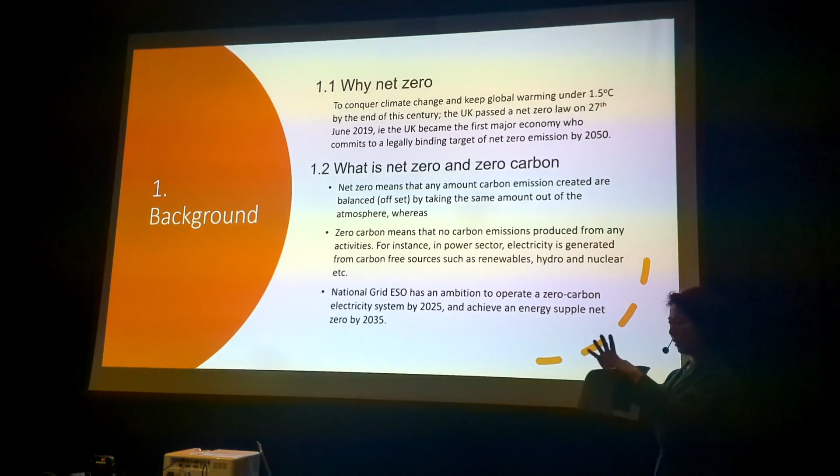So in the power sector, electricity is generated from carbon-free sources such as renewables, hydro, nuclear, bio energy, etc. National Grid ESO has ambitions to run a zero carbon electricity system by 2025 and achieve an energy supply net zero by 2035. So I will talk about this difference: which part 2025 covers, and how the 2035 scope is different.

Continuing on this background part is the role of networks in energy supply. As we know, power networks, transmission and distribution together, are transportation infrastructure to take electrons generated in power plants and send them to end users. So power networks have towers, lines, cables, substations at various voltage levels, and control centers, control rooms, hardware, software, communication networks. So that is power networks.

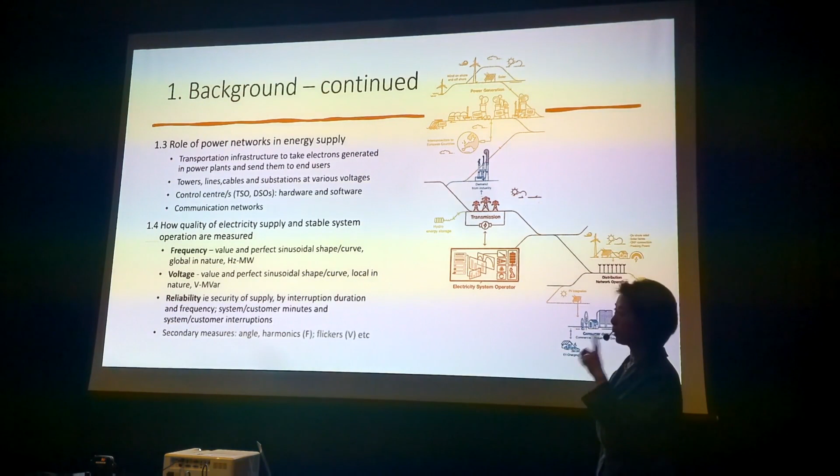And then how electricity quality is measured. You cannot see electricity, but you can feel it. We have lights, our laptops and other devices. So electricity is measured by three fundamental, first tier criteria. One is frequency: magnitude, value and shape, a very strict sine wave. In the world most have 50 hertz, some 60 hertz. Voltage, also value as well. We don't talk about direction yet, it's just value.

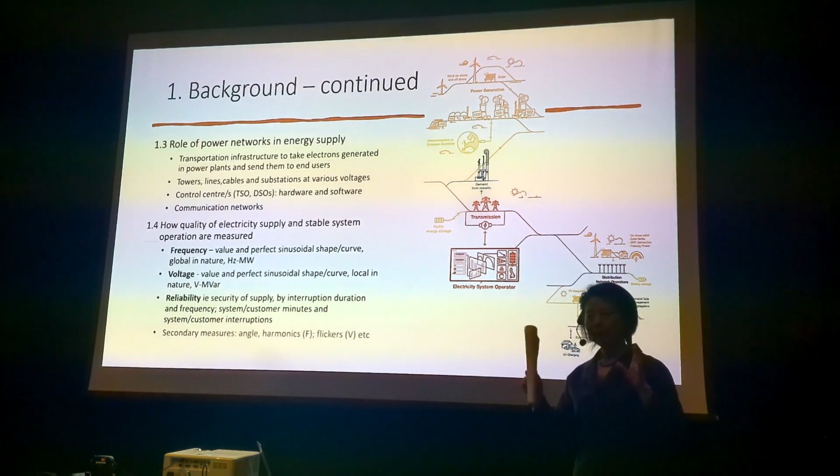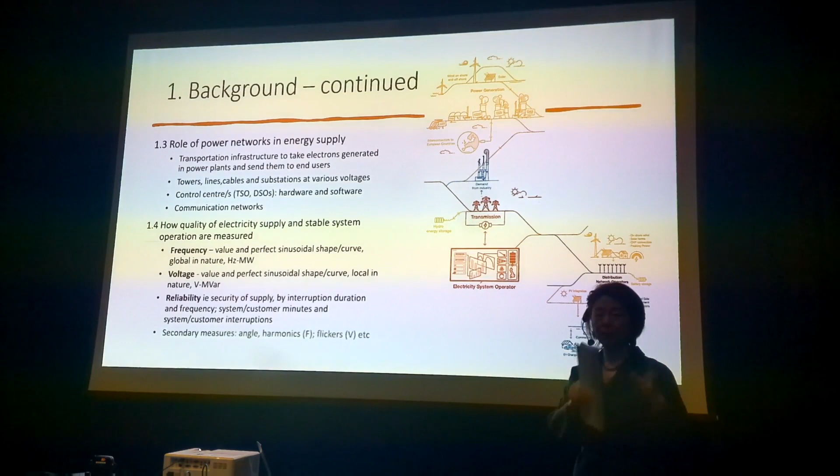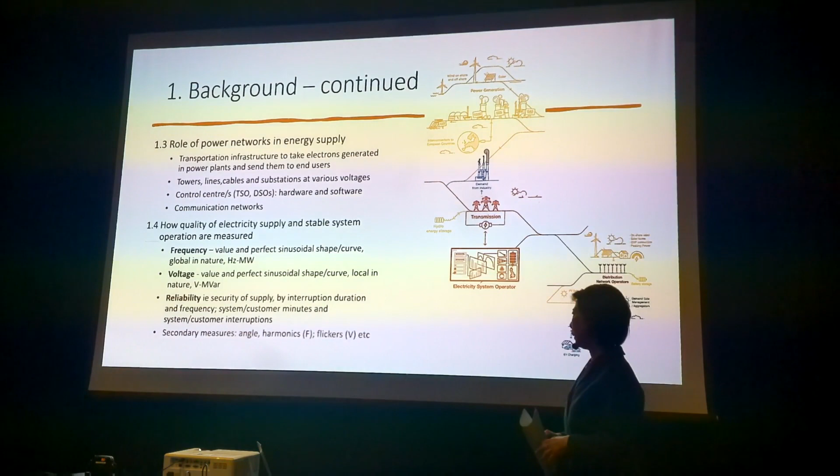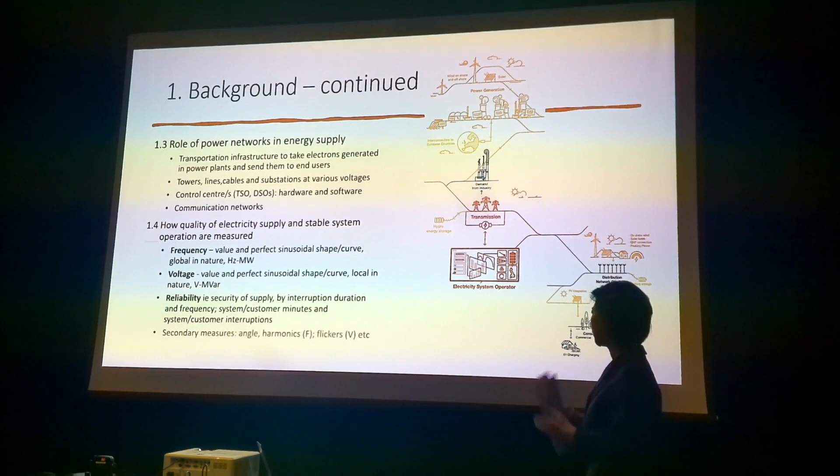The third one is reliability. The reason I mention this is because today, all the new products, services and procurements are quite dynamic. Containment, for instance, or lots of products designed, and how the electricity market runs, why they need these different bits and pieces, different markets. It's because of this: frequency, voltage, and reliability. These three top layer, fundamental parameters measure the quality of electricity. And of course there are other measures like angle on long lines, harmonics and flickers, etc.

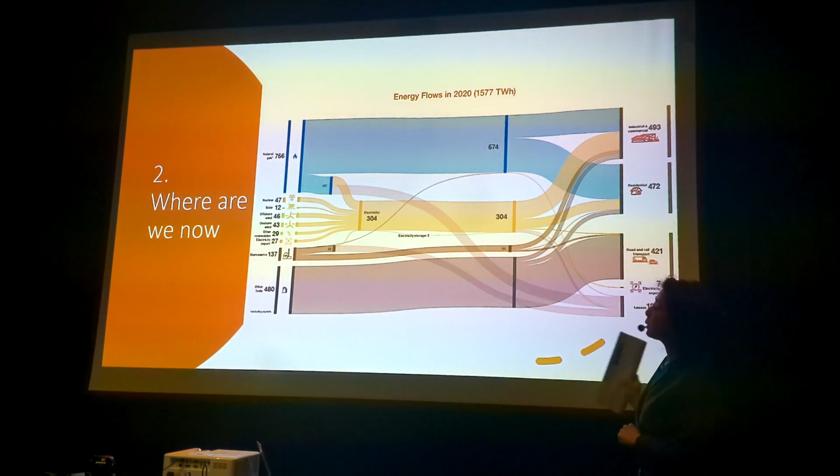Right, where we are today. This is an energy flow chart in 2020. Our energy supply and consumption was 1,577 terawatt hours. You don't need to remember exactly, but if you can, it will help you later to see our future scenario, the direction the whole economy will travel, which is to reduce. We grow the economy, we grow everything, but we reduce energy consumption and production. I will show you how that can be achieved.

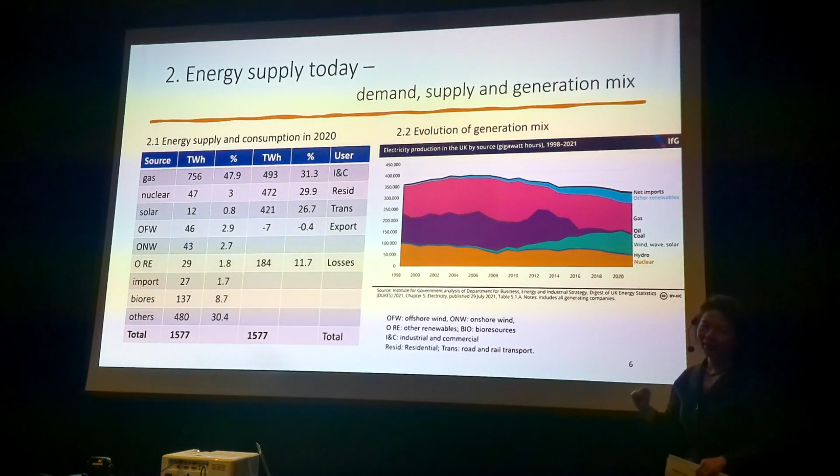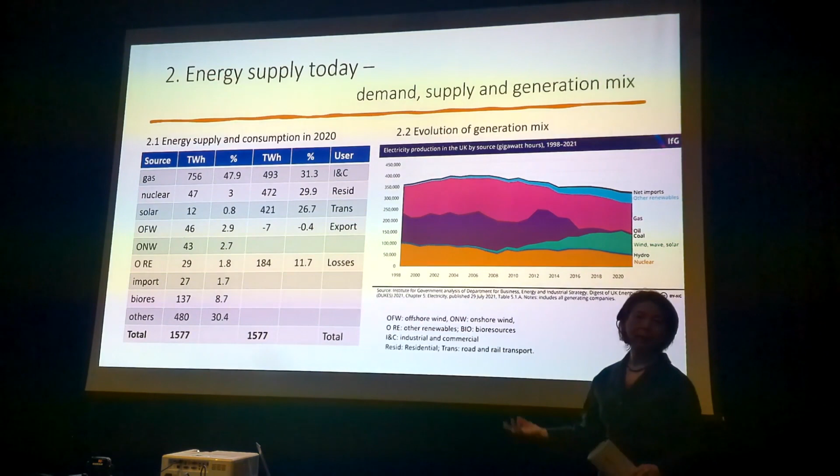And we have small hydro in the UK. Nuclear, I think, is in decline. We used to have quite big nuclear, 27% in terms of terawatt hours, but now it will get smaller in the next 10 years until, I hope, Hinkley will be commissioned by then, because another 2 plants in the existing fleet are scheduled to close for decommissioning in less than 10 years. So nuclear, we actually need more. We need Hinkley to be commissioned and SMRs somehow. So that is the message, one way to look at where we are today.

The second measure is emission. This is more direct. There are different measures when we talk about emission. Most people talk about total quantity, how many million tons of CO2. That is a common way. So to see where we are in the UK, I use these three pieces of information. One is to see where we are in the world. The good news is we are not in the top 14. I only managed to go that far. I'm sure if we look at 100, the UK will be somewhere.

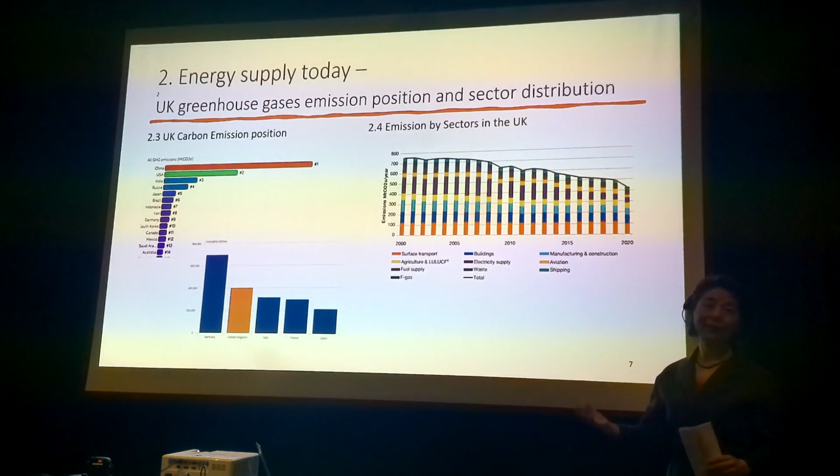So that's good news. Worldwide, UK's emission is small. But in Europe, we are second largest after Germany, and then there are other countries. That's the scale of Europe. And then coming back to our own country, it's not to blame any sector, but to see the contribution, which sector or type of technology contributes more to CO2 emission or equivalent. Equivalent must always be used, because when we talk about cows, it's not CO2, but it's one of the GHGs. So this one is UK emission by sectors.

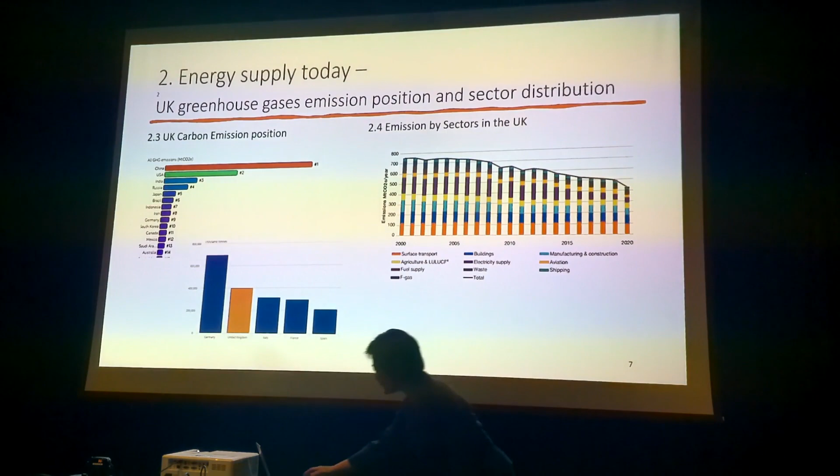In fact, the transportation or surface transport, just by looking at this, I think they are contributing more, followed by buildings, and then manufacture and construction. Electricity, the purple one, is actually quite small, maybe similar to agriculture. So this is a comparison or overview. Now I drill down from the top to more detail. This slide is to look at carbon intensity in the electricity sector.

The good news is the trend: if we look at the same time period from 2009 to 2021, the carbon intensity is reducing. This is very, very clear and consistent reducing. So that graph shows the electricity supply sectors.

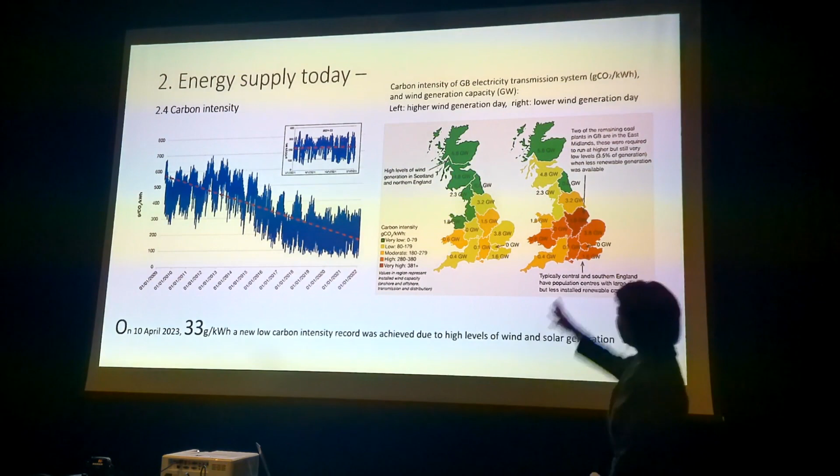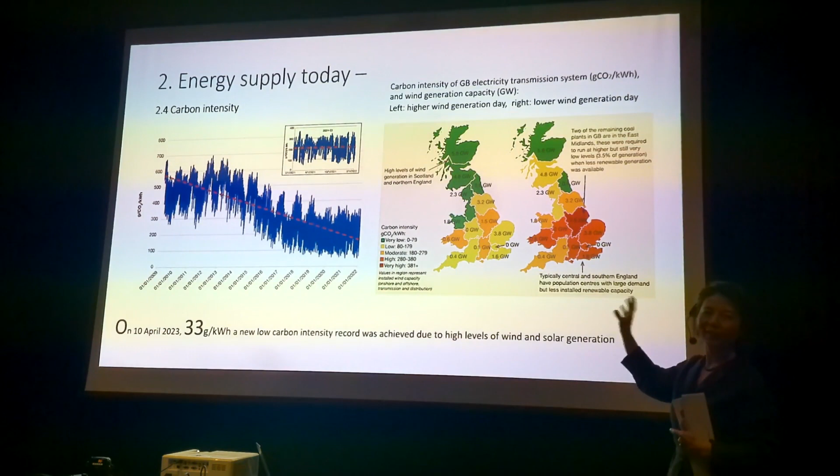And this UK map is also a comparison. The one on the left-hand side is on a strong wind day, because offshore wind produces more renewables than onshore wind or solar. So it's very important when we choose this day when offshore wind is doing good. So that side is a good day. When we have a good day, we have so much green energy produced.

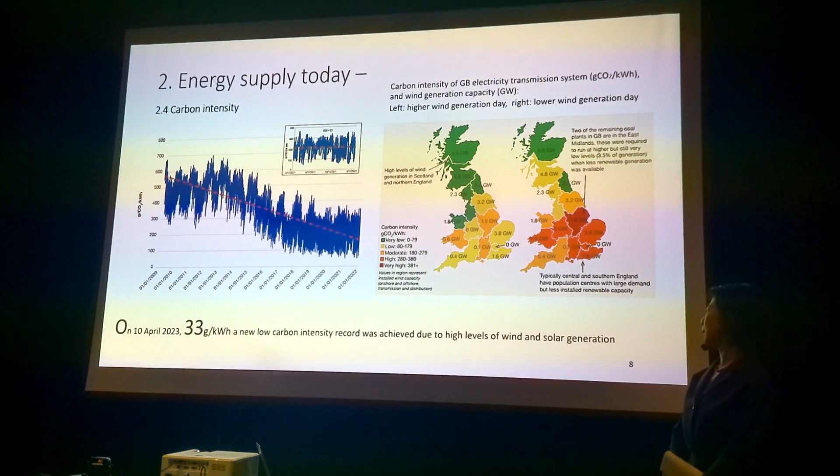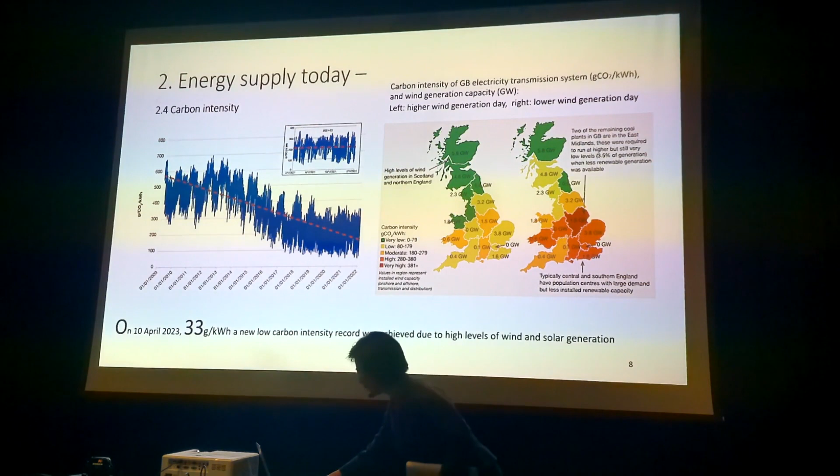On the right-hand side is another extreme, when offshore wind is low in the country. So this is carbon intensity by location, every location. Another even better news is, very recently, I saw this in a news piece: on 10th of April, National Grid recorded the lowest ever in our history, 33 grams per kilowatt hour, a new record carbon intensity this year, due to the high level of wind and solar. So this is where we are.

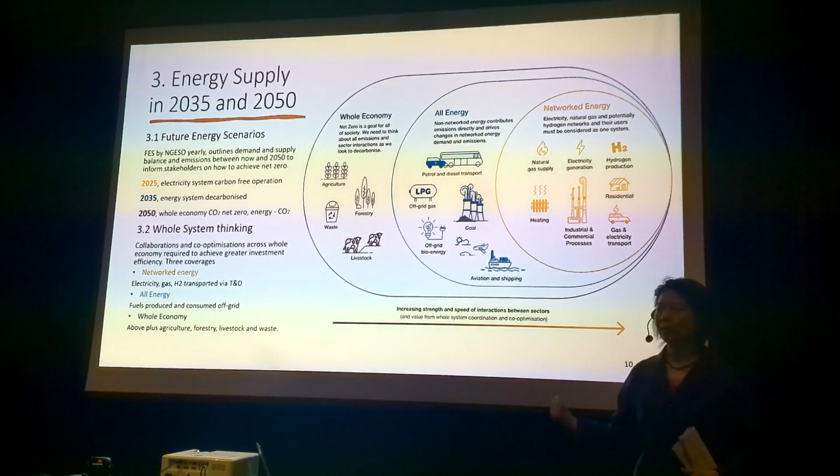So the first one is by 2025, electricity system carbon-free operation. What does that mean? Actually, I can't remember the date, but last year we had a short time period, a few days, of purely clean energy. So that means we have offshore wind, onshore wind, solar, nuclear, and hydro. Most likely in the summer season, like from now to September, these 6 months. Demand is low and all the renewables are good.

So by using hydro and wind, together with some battery now, that's good. So the system can work. But in winter it's harder, much harder. So by 2025 is carbon free, that means carbon zero. By 2035 is to decarbonize the whole energy system. What is the difference? I will come to talk about it. And by 2050 is whole economy CO2 net zero.

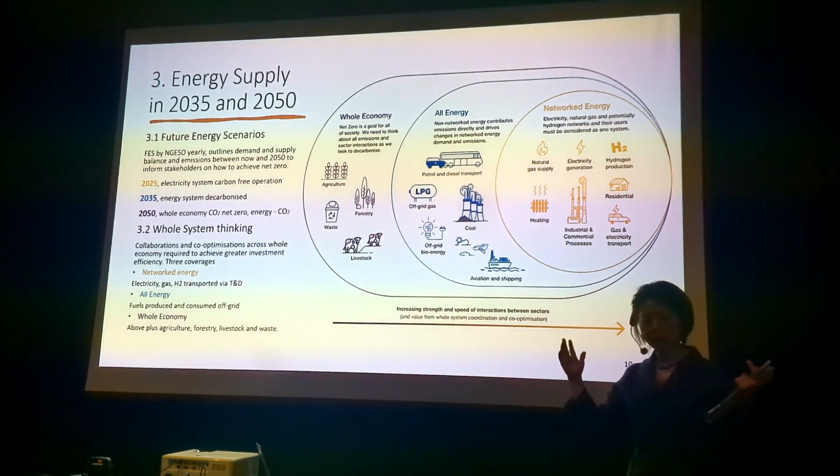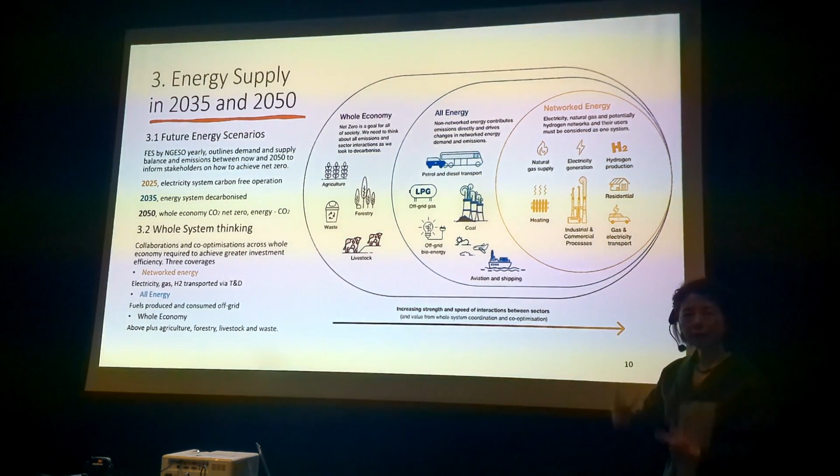CO2 net zero. So the whole system thinking is to put the whole thing together, because when we say our country needs to be net zero by 2050, so what? What should I do? What National Grid did is, I think, quite logical. Firstly, they look at the networked energy. So all the electricity or gas or whatever comes to the network, so they can record it precisely. They have direct control or dispatch. So that is the first part, the networked energy.

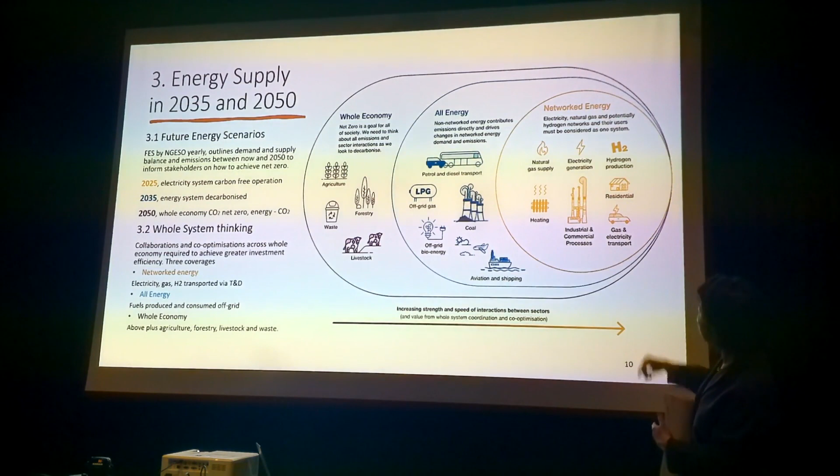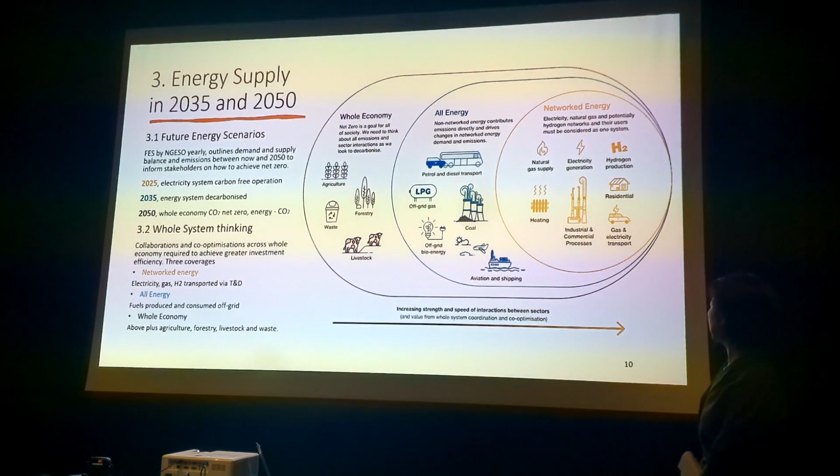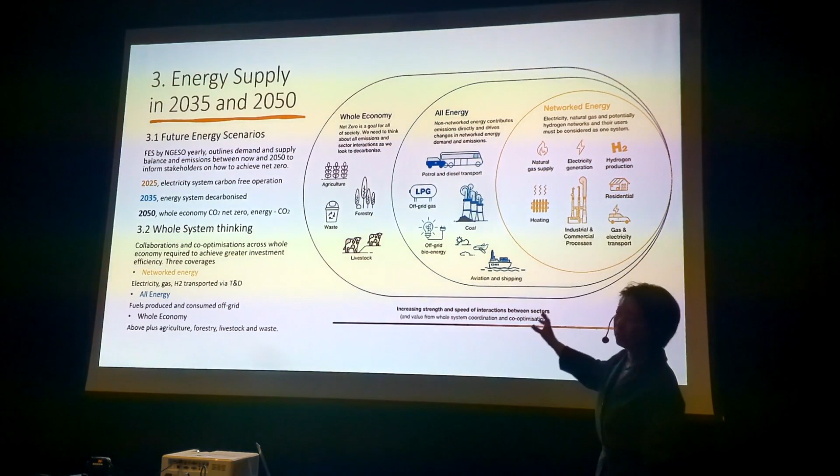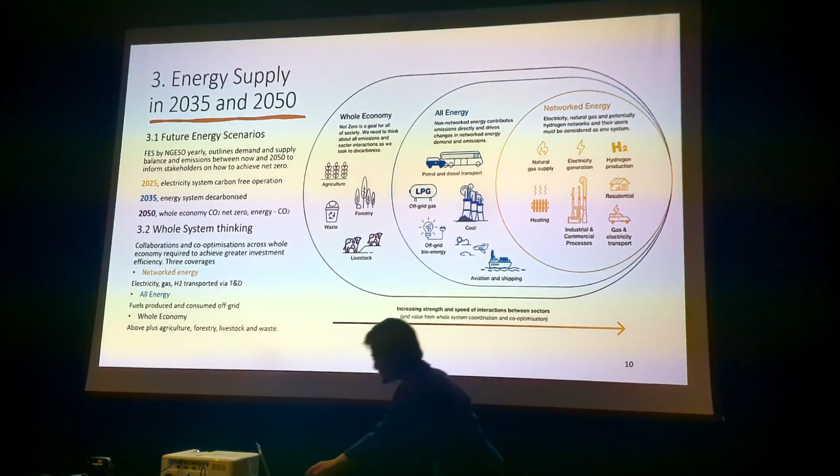That's one scale. And then go to the next part, extend it to whole energy. So the whole energy is networked plus petrol, diesel, transport, shipping, everything off-grid energy. And then we extend it to the whole economy. So the whole economy carbon emission equals whole energy plus agriculture, forestry, waste, and livestock. So this is how we evaluate the whole issue. That's that.

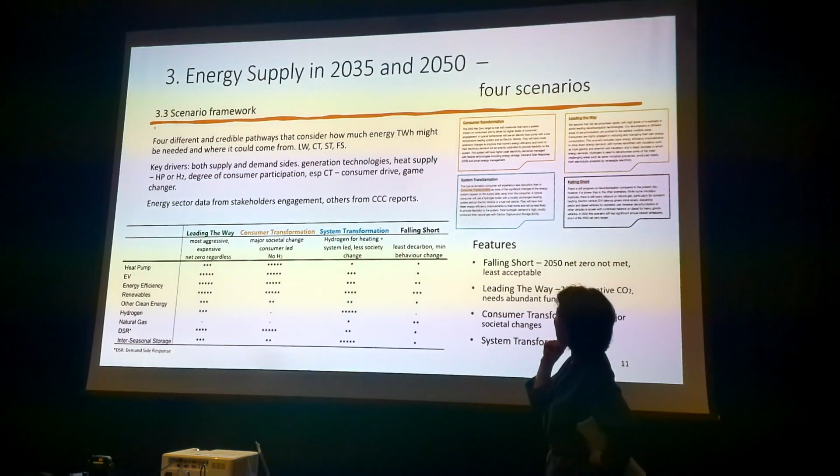The four. I touched on this before. So the key drivers are those things, and the energy sector. Remember, I said that National Grid have a whole team doing this all around the year because, in fact, doing this modeling or study work needs lots of information.

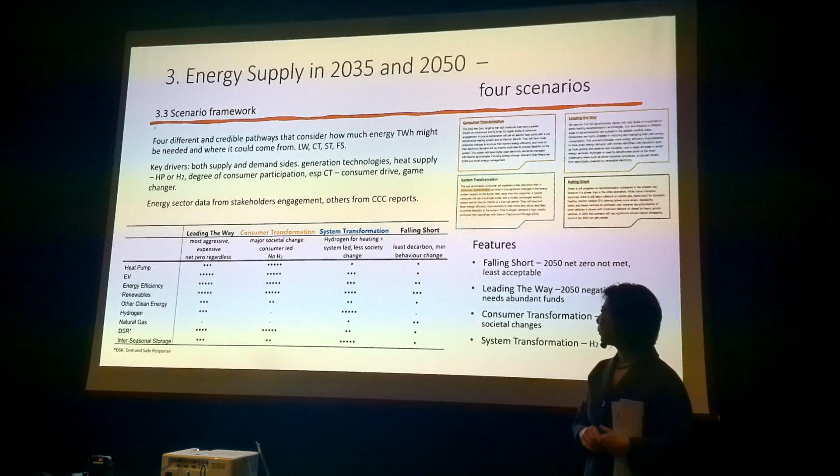The energy information they can engage with. There are many engagement meetings throughout the year with lots of people. They can get it directly, and it's much harder and time-consuming to talk to rail and buses and get information from there. So therefore, apart from the energy sector, all the other sector data come from the CCC report. That is also the source information our government uses.

So the features, I summarize them in the boxes, but as lots of small reading, a very concise way to understand and compare the differences is this. Falling Short does not achieve net zero, so it's the least acceptable scenario. And Leading the Way can achieve negative, so negative CO2, but needs abundant investment, lots of money.

Therefore, in my personal opinion, I think realistically we may end up with some of Consumer Transformation, some of System Transformation. The reason I say that is we see every country has a hydrogen program initiative. However, the UK government has not made a decision yet. They will make the decision in 2026. So therefore, we can only say potentially. I think we will do that.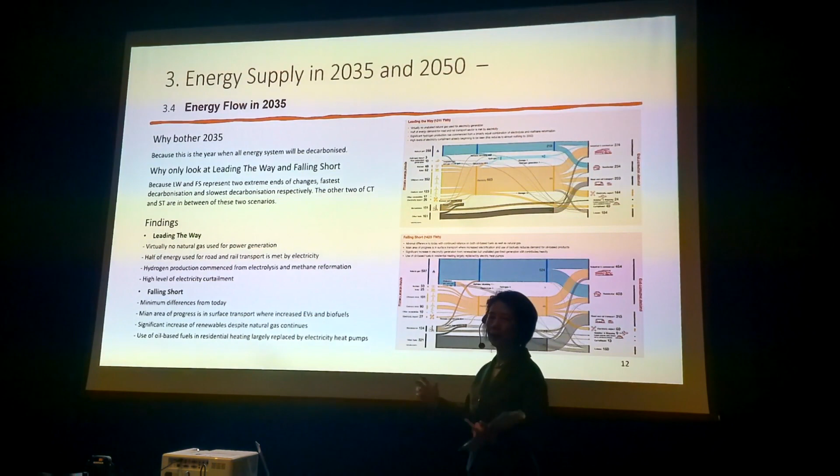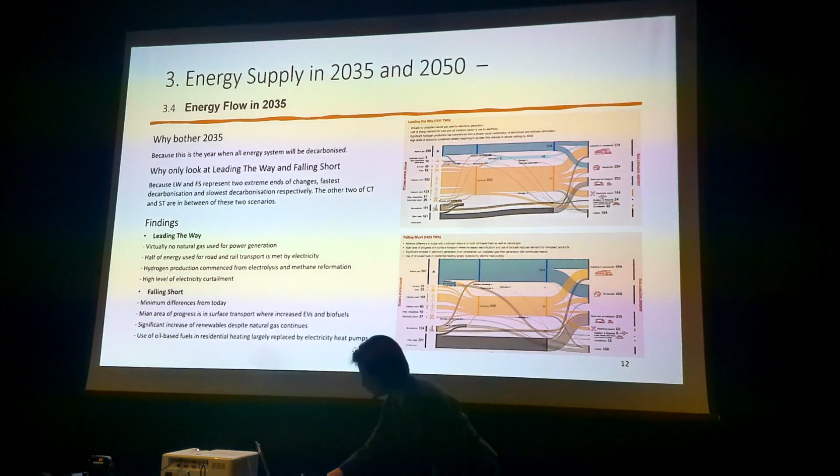Leading the Way, the most aggressive, has no natural gas already by 2035. Half of the road and rail is electrified. I think electrified transportation plus hydrogen, maybe hydrogen and electricity, we may get into a mixed picture in the future, and Falling Short. So let's focus on 2050, which is our ultimate goal.

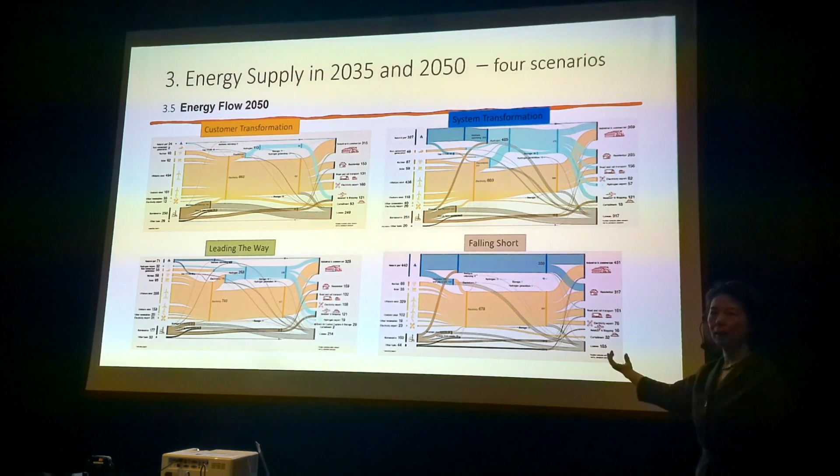So in 2050, we look at the scenarios. I put Consumer Transformation and System Transformation at the top, because I think these two scenarios are more likely than the other two. If one day, not today, we have lots of money, we just get on and take the technologies whenever they're ready. In my opinion, Falling Short is not acceptable. I put it as the least acceptable.

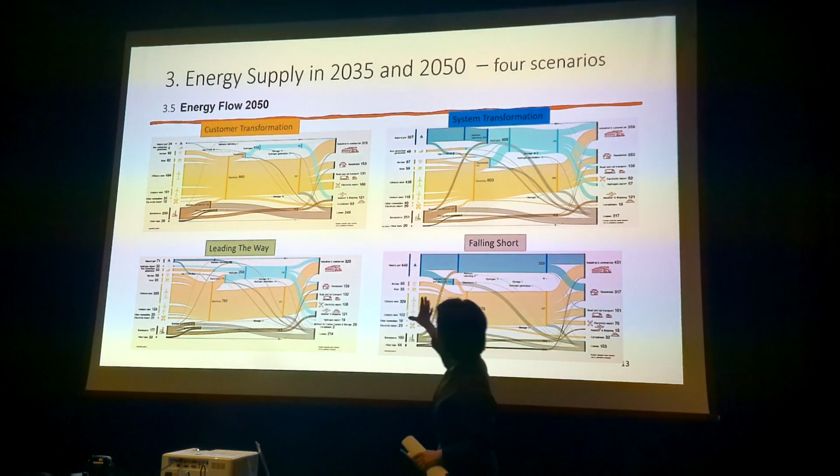So this is the energy balance, supply on the left and consumption on the right. Similar format as our current energy supply and consumption, or demand and supply balance flow chart. The energy balance considers the losses, so in and out. If that diagram is too hard to see, I just extracted the key messages of these four scenarios in the four boxes.

I've already indicated the difference. Consumer Transformation means home heating and building insulation, lots of building insulation work. Otherwise, it cannot be achieved. Remember the three types of mix, generation mix or consumption mix: home heating, transport and industry are largely electrified. That's Consumer Transformation. High energy efficiency and large-scale electrification lead to the lowest energy demand. Electricity generation highest, high renewables, little hydrogen.

This is another key difference. And therefore, curtailment is high. We'll talk about curtailment later, what you have to give up, like wind. In System Transformation, it has the highest hydrogen consumption for home heating, industry and HGVs, all hydrogen produced in the UK. In Consumer Transformation, the hydrogen we use we import from other European countries. Highest hydrogen export, biomass used to produce both hydrogen and electricity. So the difference is clear now.

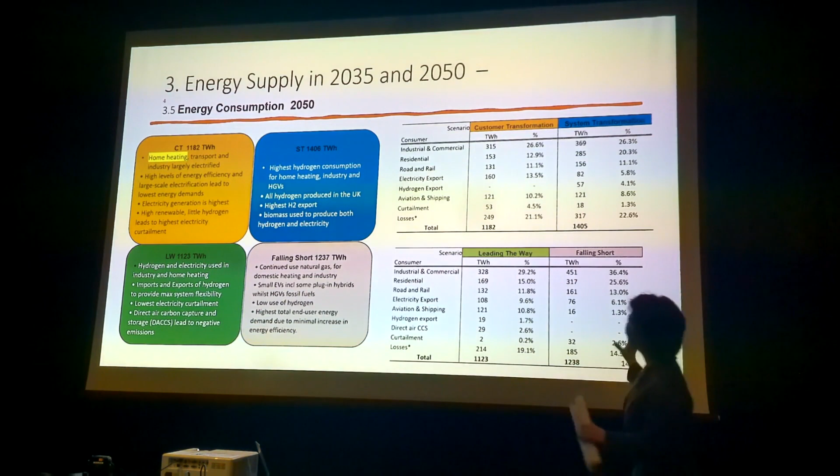But System Transformation uses the most, because with electrolyzers you have to transfer energy. First, you convert water to hydrogen, and then use hydrogen to produce electricity or whatever. So you do it twice, that's why this is high. Falling Short is in the middle. So this is the 2050 scenario.

Another way to look at these scenarios is from the generation mix point of view. This is better than numbers. I did that table first, and then I thought, why not use this? This is clearer. You can see in Consumer Transformation, very obviously, offshore wind is much more than in System Transformation. So in terms of energy production, it's also this. No, this is a mix.

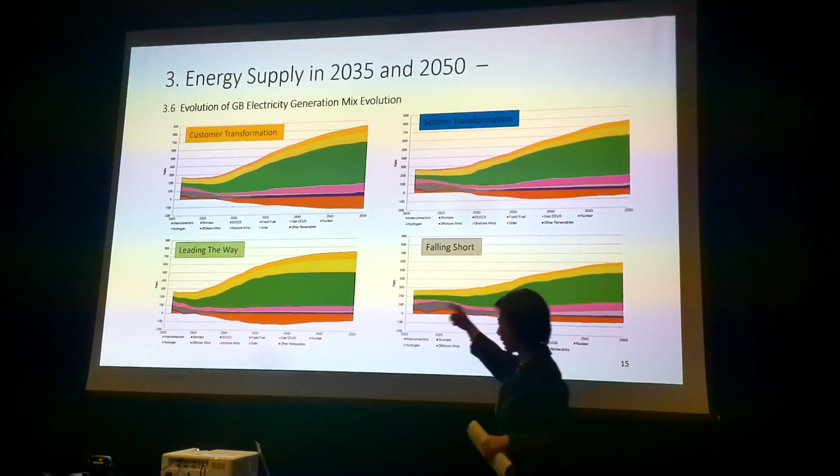Why some part is negative is because of import. We have interconnectors, now we have 10 or 11 interconnectors. So that's why in the energy consumption and generation it's negative.

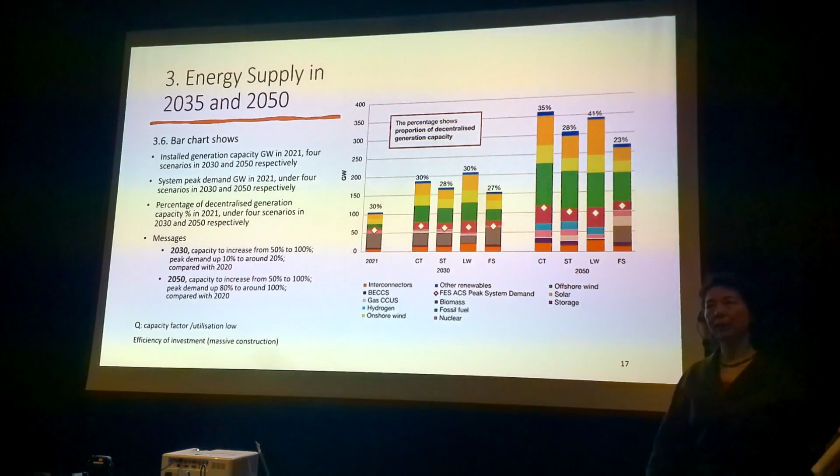This graph is actually very interesting. It has lots of information, very condensed. It's interesting because it tells you not exact numbers, but the trend, and you can easily see the differences between the four scenarios. Very directly it tells you the installed capacity is not measured in terawatt-hour, but installed generation capacity, to begin with on the y-axis.

That's the first piece of information. Second one is peak demand, this diamond thing in the middle. They are lower. So the peak demand, this is over the years, how peak demand will change in these four scenarios.

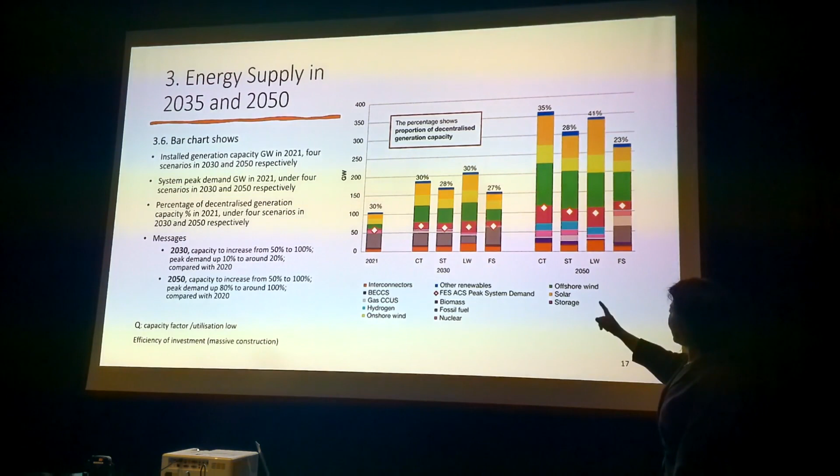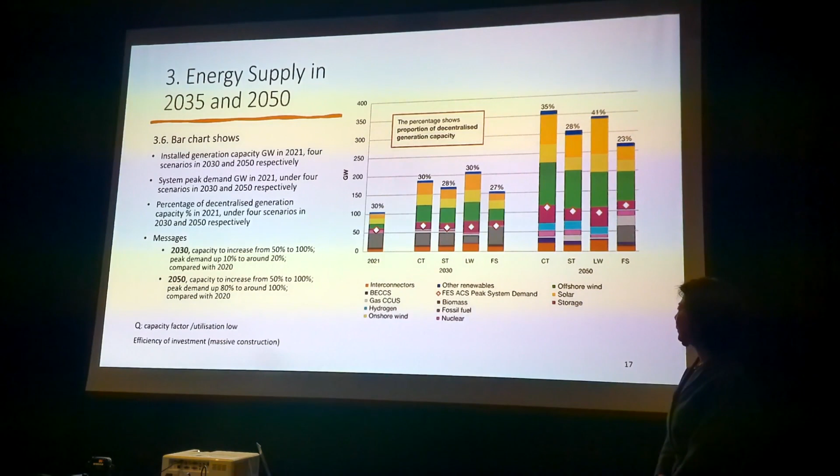So that's not just one year, it's three time periods. We call it current, 2030, and 2050. And it also indicates the percentage of decentralized generation, which will grow over the years slowly. So that is what this graph is about.

But the message is: by 2030, the generation capacity installed will increase from today by 50 to 100%. So lots of construction work. Peak demand up 10 to 20% compared to 2021.

In 2050, the capacity will increase from 50% to 100%. Peak demand up 80 to 100... it was because of electrification, heat pumps, electric vehicles, these two, compared to 2020. And then you can see the curve.

And I have a question I was thinking: in fact, the capacity factor, or asset utilization, is lower than today. Today we have just over 100 gigawatts to supply a peak demand in winter of 62 or 65 or 60 something.

And by 2030, our peak demand didn't increase very much, maybe only 10%, or in some scenarios 20%. But the assets we're going to build is twice as much as today. Twice. Just look at the bar chart. And by 2050, even more.

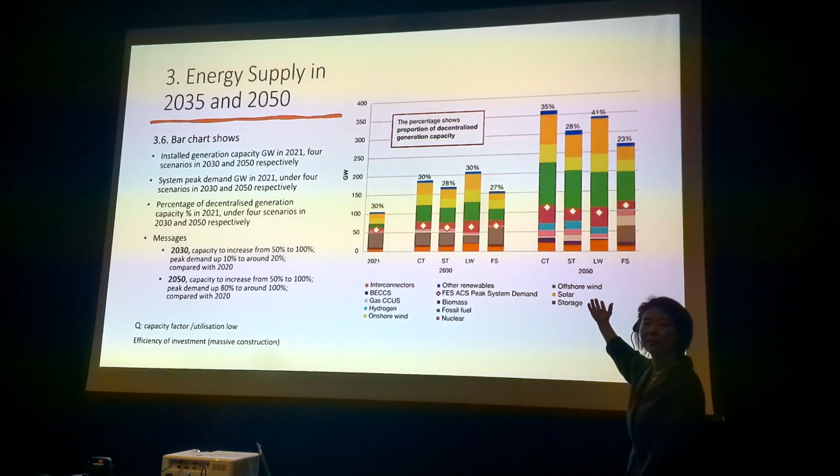So what I'm thinking is, when we evaluate which scenario is better or more suitable - put it that way, not which one is good or bad, but which one is better than another - I think we have to consider all of this. This is definitely this one. Because another question that comes up is, what is the efficiency of investment?

The beauty of this report, of FES studies, is it didn't tell - because I had lots of meetings with National Grid recently, different ones, there's another one in May, another one in June, but not on this phase, but on the balancing market changes, optimization, system optimizations. So I think it just depends on how we see this.

How we see this - well, we can spend many billions to build this. And then, today, we don't know what other disruptive technology we can have by that time. Maybe, I hope, we will have more disruptive technology that can help us reduce the construction.

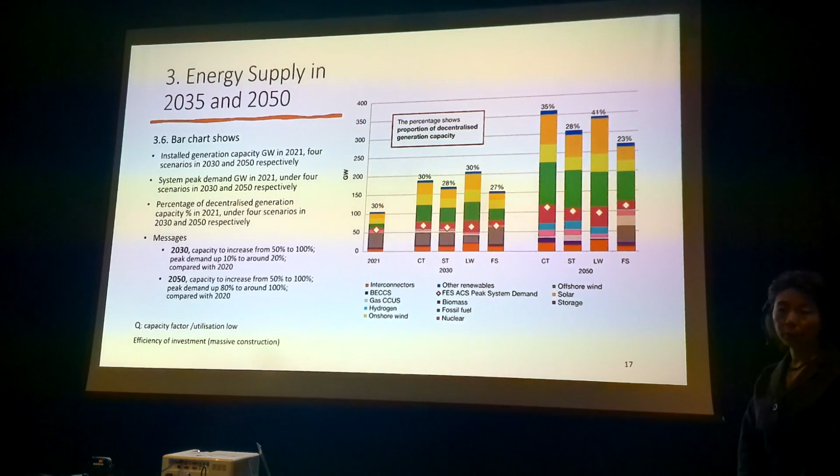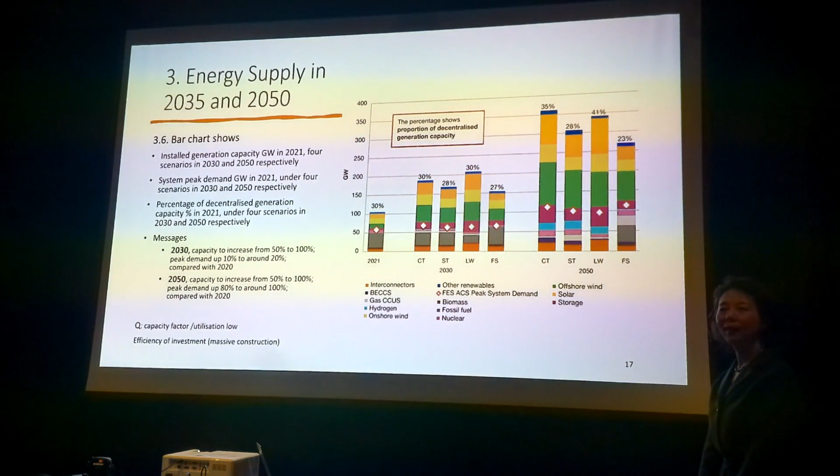Look at this, 350, built so much. Well, everywhere is a construction site by that - in the next 20 plus years. Everywhere, basically. So this I put on the bottom.

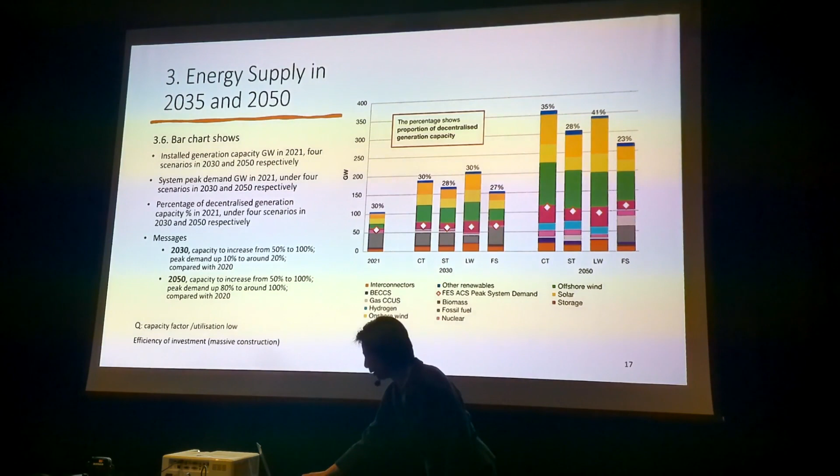I just want to share with you, it's not to challenge anybody, say they are not - I'm sure they think about this as well, because we debated this. I think it was in February in London, and exactly this efficiency of investment.

When I was at Mott MacDonald, I managed - I did lots of different roles. One period I was a professional excellence director, and I had 8 initiatives of leading edge technologies. One was smart grid. The spirit of smart grid, or smart whatever, is efficiency of investment. There's no doubt, though of course there are some countries that just want to show off how much money they have.

That's a different matter. Okay, let's look at what our mission will be in 2050. So in this, all the scenarios, we already know falling short cannot meet net zero. This is graphs.

Graphs - the first one, I try to get the same sequence so people get used to it, not a shift. So consumer transformation, system transformation, and leading the way - no problem to reach zero, actually it's negative because I already know. So the energy sector, the whole economy - energy sector is net zero by 2035, but the whole economy could be zero by 2050. In fact, we're negative in these 3 scenarios already. That's good news.

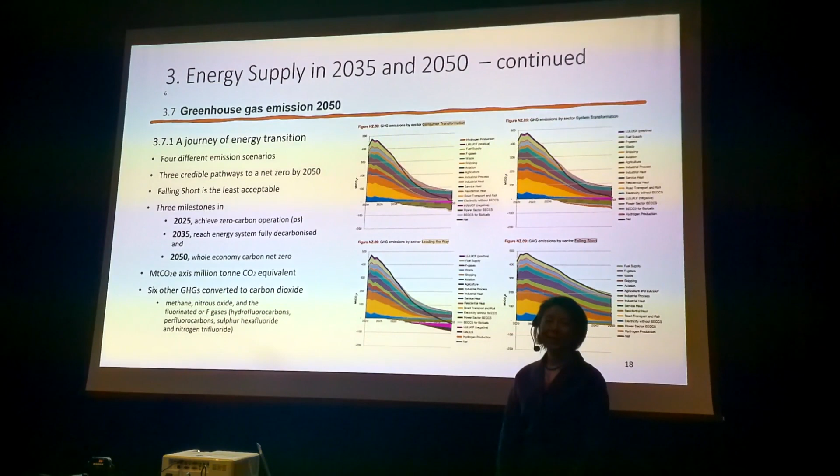So this considers all kinds of GHGs, greenhouse gases, all of them together. That's why you hear the news about people inventing some stuff to feed cows to make them emit less. I don't know exactly, but that's it.

We know 2050 will happen. Every time I go to these meetings, everybody seems very confident, saying yes we can do it, we must do it, we can do it. I'm also a believer of net zero, because I didn't believe it would come in 2000, and it happened. I didn't believe those things, but history proved I was wrong.

So, challenges - what challenges do we have? Let's start from generation. On the generation side, we know the technology - onshore wind, offshore wind, batteries, solar and so on. Of course all of them need improved efficiency, because currently solar is very, very low - not talking about number of hours of sunshine, but even if we set 100% sunshine, the conversion is still very low compared with others. I'm sure that will improve, lots of things will improve.

Let's focus specifically on the transmission and distribution side. We have to handle intermittency to begin with - we've known this for quite a long time. Fluctuation, non-dispatchable generation can cause problems to the power system, especially at night when people don't use much electricity.

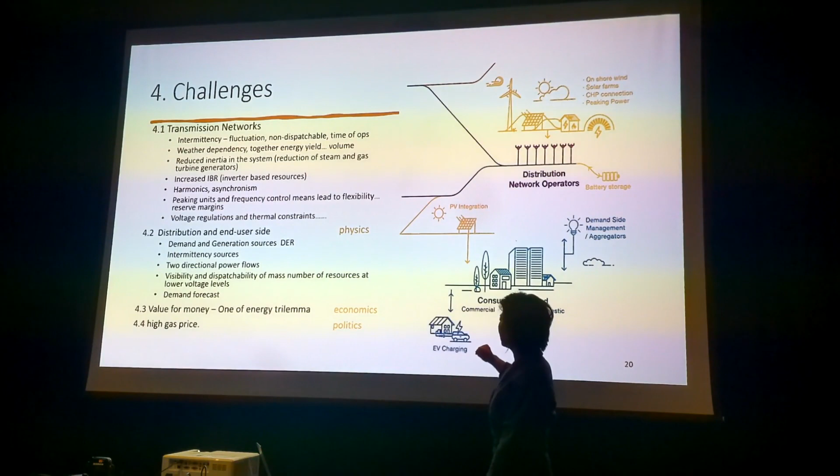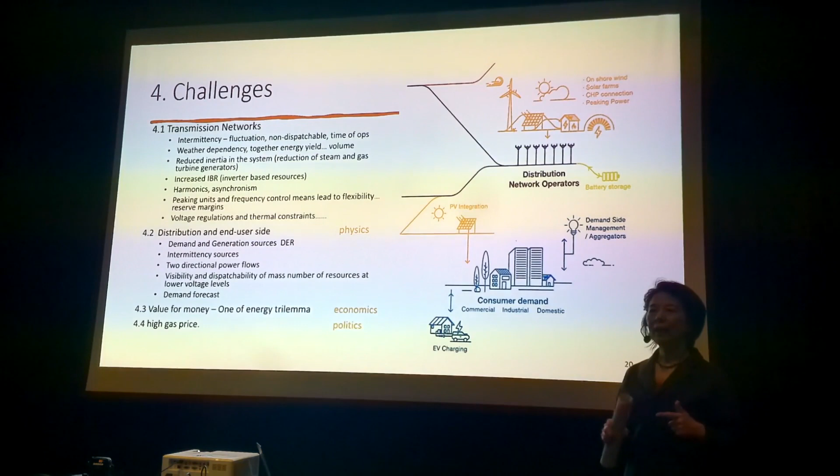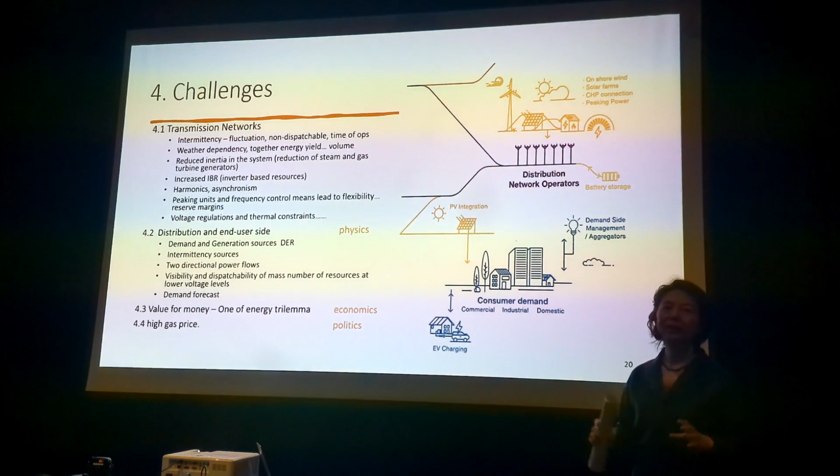Electricity trilemma is: security, number one, which means reliability of supply. Second is sustainability, being environmental friendly. The third one is value for money, so not too expensive. In other words, can we get least cost power supply? So that's the trilemma.

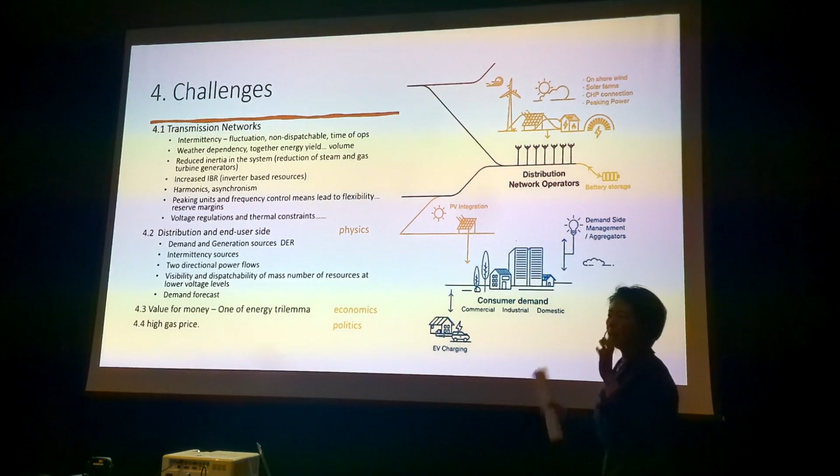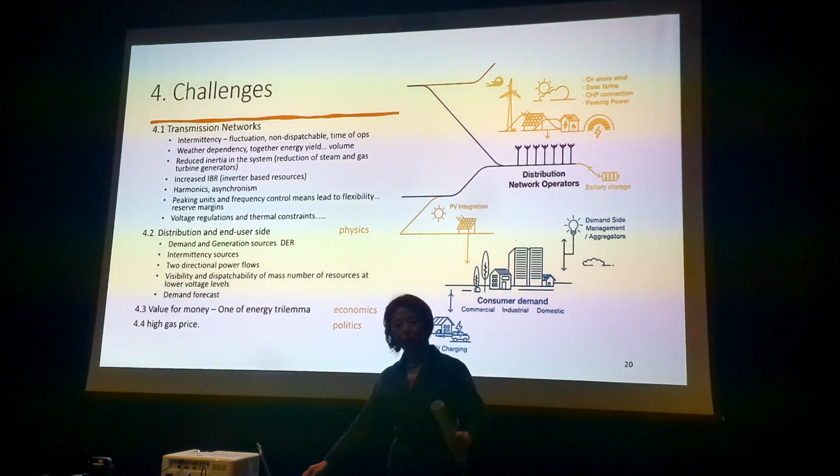And also, of course, there's contemporary geopolitics, high gas price. So when we work on the scenarios, set up 4 scenarios and model things, considering different technologies, we have to consider all these things together: physics, economics, and politics. Later on I'll give you another example, and when we design the future energy market, what principles shall we take?

So this comes to my next part. What changes are required? We know our goal, that the 4 scenarios are our goal, and we also know the challenges. So now, what changes?

DESNZ is now leading a program called REMA, Reform of Electricity Market Arrangements. So they look at how to enhance the security of supply and reduce the bill, and also encourage more technologies. So the objective of REMA is a major review of the GB electricity market design, to radically enhance energy security in the long term.

Secondly, there are changes to the wholesale market, meaning the balancing mechanism, to mitigate the impact of volatile gas price on electricity. The third one is to reduce electricity bills.

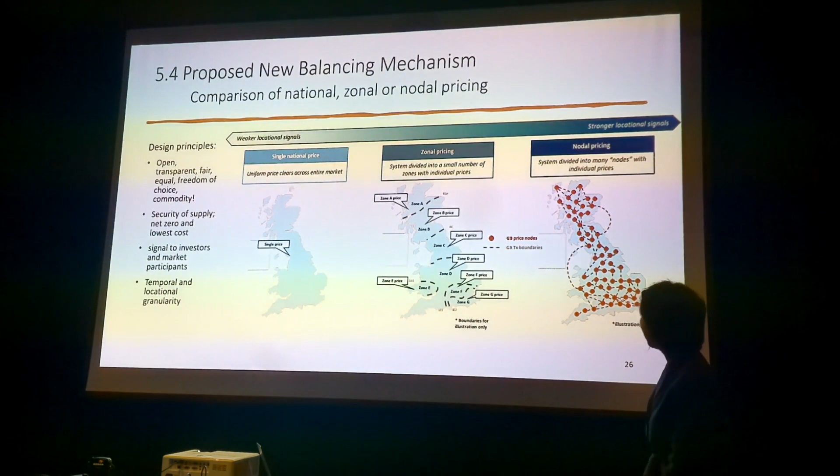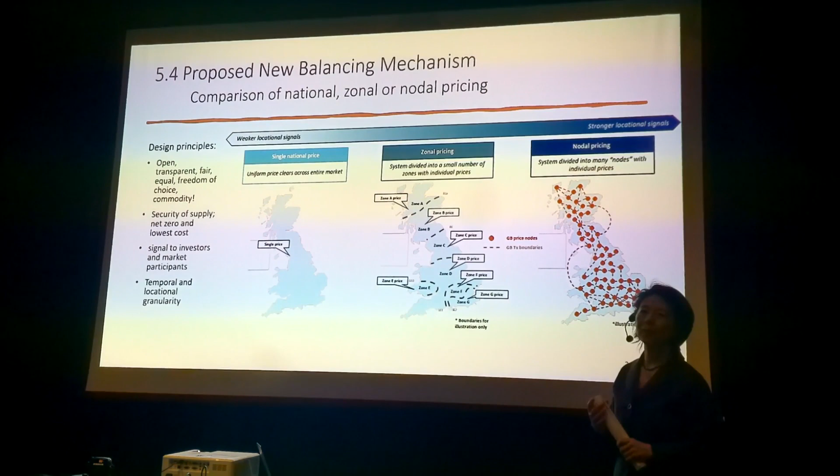The right-hand side one is nodal pricing. This is the one I like most, but that does not mean other people like it. I think it's more precise, and you will see from the example why it is cheaper for customers, for energy consumers. Around the world, there are different countries. Some countries adopt national, some adopt zonal, some adopt nodal pricing. You talk to 10 people.

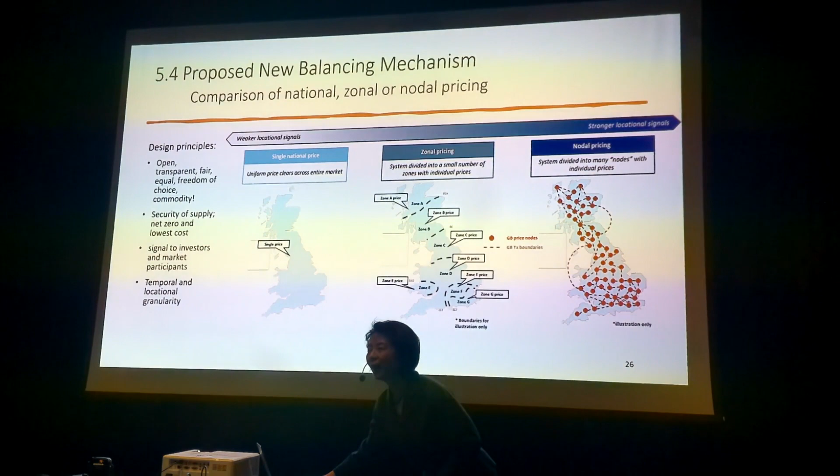Can I just ask, if we came to nodal pricing or zonal pricing, what sort of differences did you find between the nodes? Yeah, I come to the example. All right. I have examples here. So this is not the example I give. This was actually in a meeting with a very well respected consultant. They did this piece of work, and they are operating nodal pricing in the country for many years. So this is the example to show the national market.

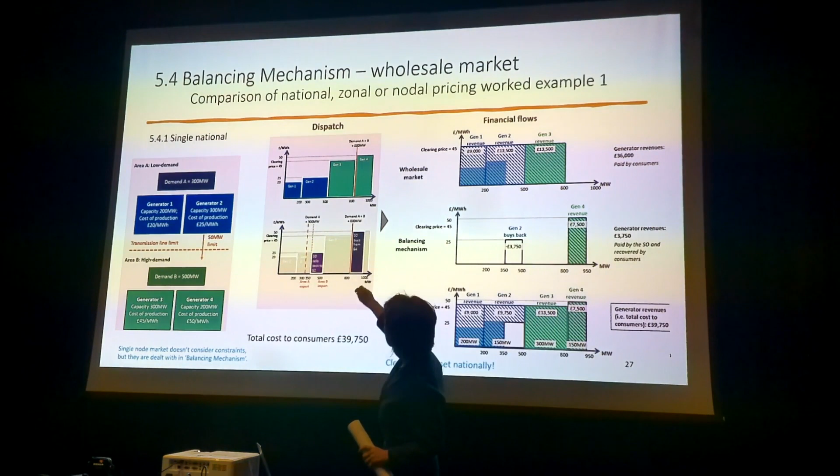If there is a national market, we have these two generators in one place, area A, where the demand is 300, one generator capacity 200, another 300. Area B is demand 500, generator 3, 300, generator 4, 200. To work out the price, if we use the national market or single node market, we begin with the cheapest, £20, and that's not enough to meet 800. We go to 300, that's 500, and that's still not enough, and then we come to the 300. So these three units, generator 1, 2, 3, can meet demand, in a situation with no system constraints.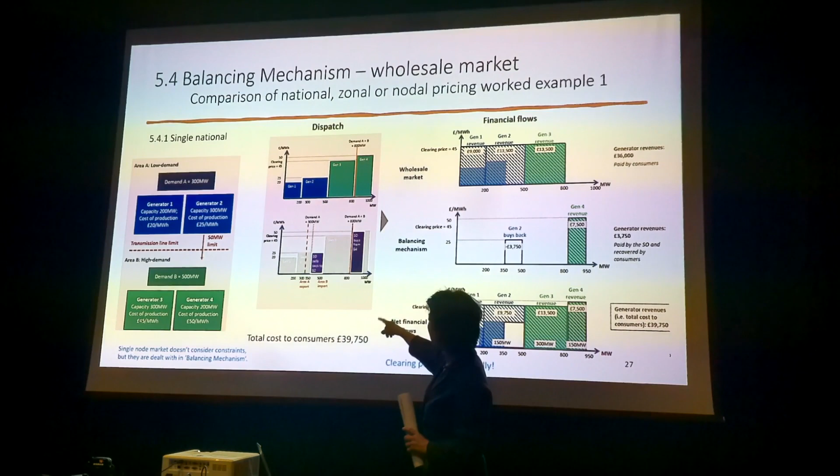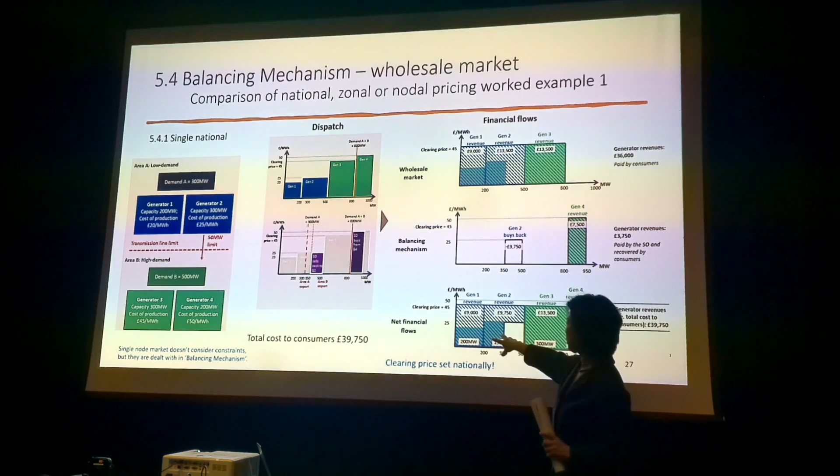Now, using this to work out the price, I will show you in a table. My table is easier to see than this building block, how they balance. The system marginal price, the clearing price, is £45 because that's the most expensive unit. However, there is a transmission constraint on this line. So not the whole 300 can be sent. They only can send 50 over. So therefore, they have to buy back from generator 2. In the end, the total cost to the consumer in this scenario to supply 800 is 39,750 in the national market. Next is the zonal market.

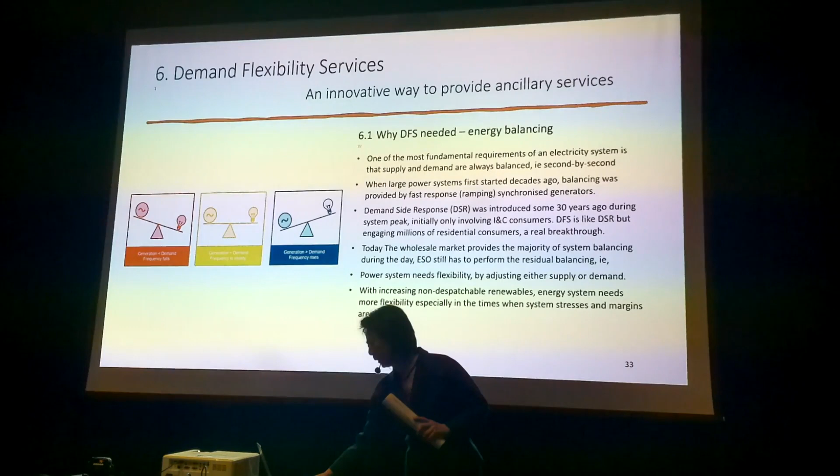Now I wrap up. This is the very last part: how you can get involved. We already know the power system must be operated to make supply meet demand, keeping the demand supply balance second by second. This is the nature because of the frequency and the voltage, lots of other things. So this is the fundamental requirement, energy balance, second by second. The second point I skipped, I said it already. The third point, demand side response.

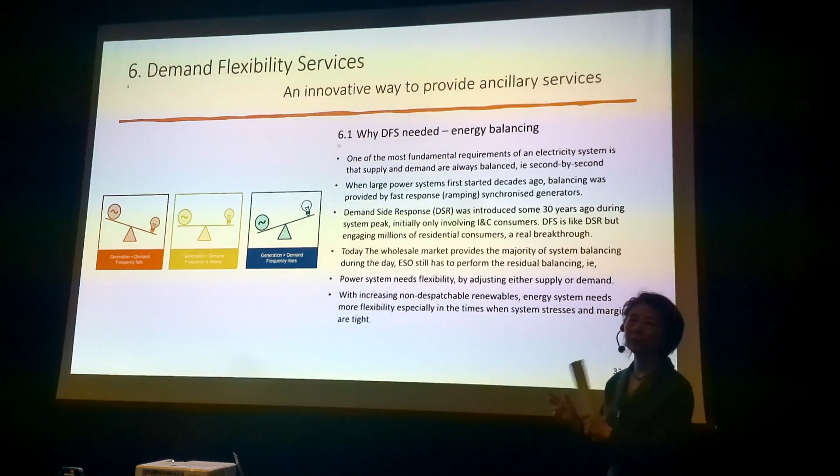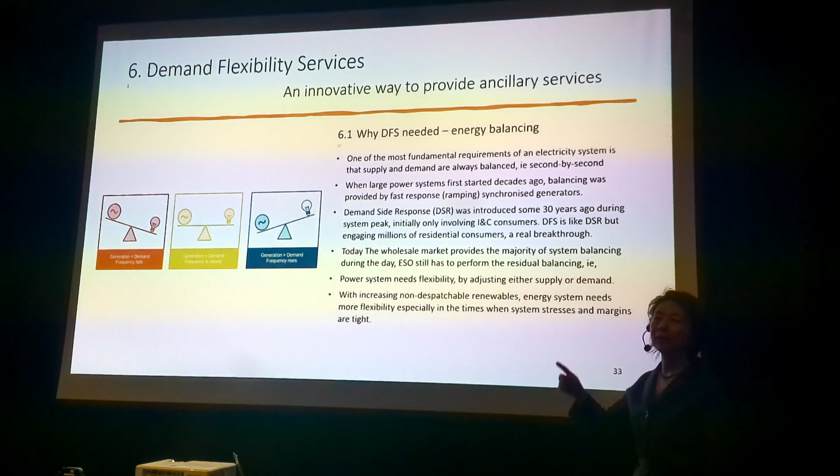Actually, you must know this because they started this 30 years ago. Of course, I very much admire and respect whoever proposed demand flexibility services. It's really, really clever. You can think about it. In the past, we wouldn't bother to consider every household, and this considers every household. So very good, but in nature, it is a type of demand side response, which we have done for a long time, very successfully. So the power system needs flexibility by adjusting either supply or demand.

So that is background. This is the key part, the last one from this last page. Who can participate in demand side, demand flexibility services? One is you must have smart meters. Otherwise, how do you know how much you reduce?

DFS was launched last year in winter. So the winter 22-23 would start with October to March, 6 months. And now we are in summer season. So there were 12 test events that happened. And I think the most attractive thing is this price, the tariff is very lucrative. £3 per kilowatt hour, or 3,000, is very high.

It's very high. I'll give you a comparison. This graph will give you a comparison. It's much higher than the day-ahead market. It is also higher than the real-time market. So this price is a gap.

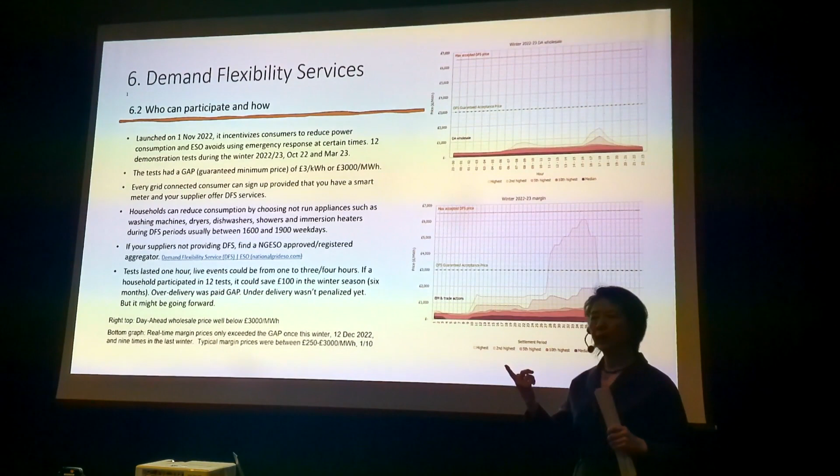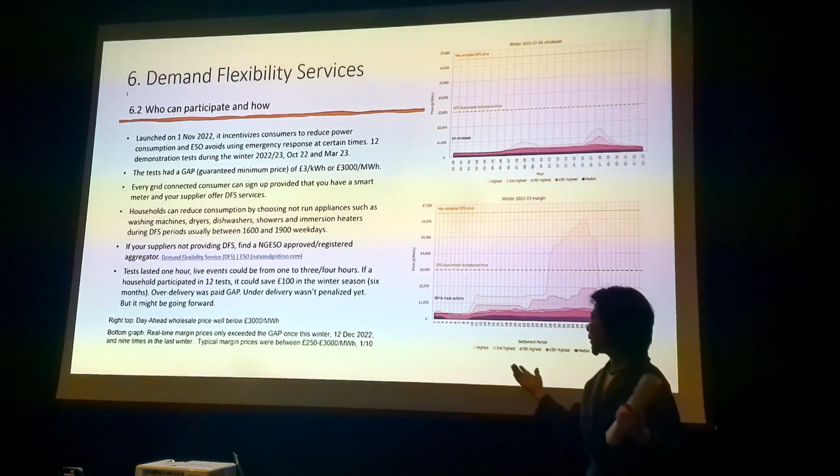For instance, if they ask you, okay, how much do you want to do? Say today is Tuesday, Thursday 5 p.m. to 6 p.m. But in fact, you did longer. You started before, or you extended it to the next hour. So they still pay. But in the future, they will have different rules, so if you schedule, say, I want to supply all 3 hours, I'm not using my fridge, freezer, or all this heater stuff, you can, but they want you to bid first rather than instant.

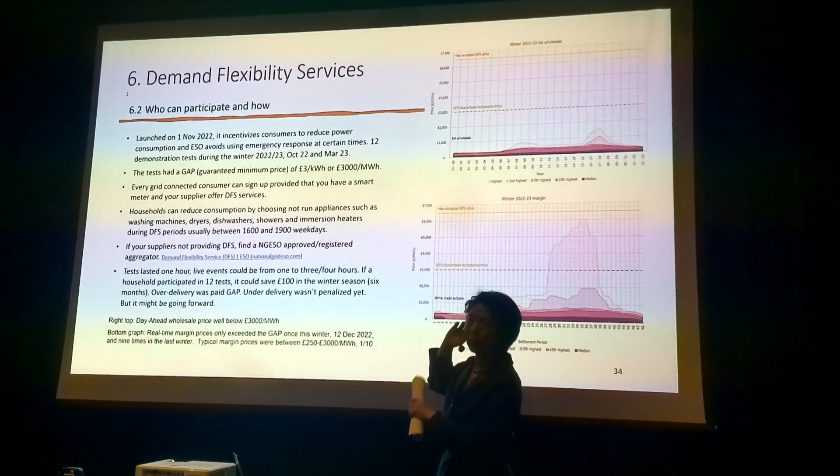So the test has been done, and this 3,000 per megawatt hour price tariff will continue. So as you can see from this graph, this price is absolutely like a ceiling price. Because somebody said there was one time the dynamic price was higher than this, but it was very unusual.

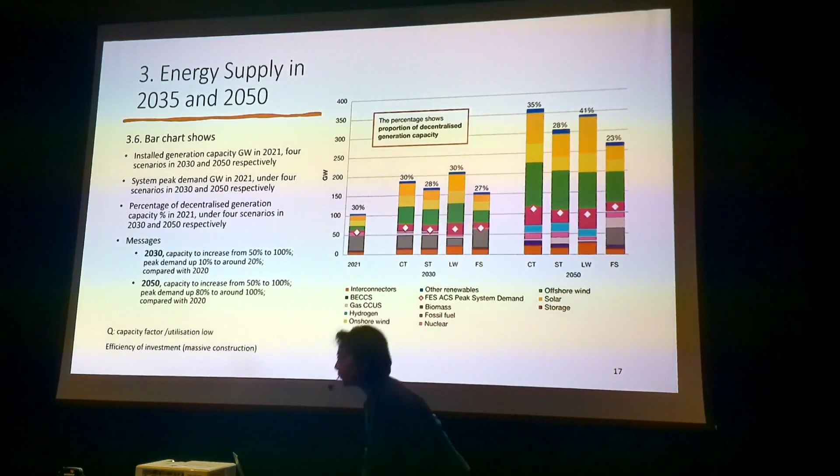Okay. There's another question here. Can you just go back to slide 17? There are some acronyms that I was actually... Oh, 17. Go back to 17. So in the bottom there is ACS, and also those acronyms in the bottom, and the next one. Oh, this. Okay. BECCS is bioenergy with carbon capture and storage. And the next one, gas, is gas. CCUS, carbon capture, usage and storage.

Oh, ACS, average cold spell. The average cold spell is to define how you decide what is peak demand. So in our system, how do you make the peak demand? Average cold spell means you take the 3 highest demands during the winter months, I think it's November to February, take that and average it. Use that, for this purpose, as peak demand. FES? In front of the ACS. Oh, FES. FES is Future Energy Scenarios. Sorry, I didn't give you an explanation over here.

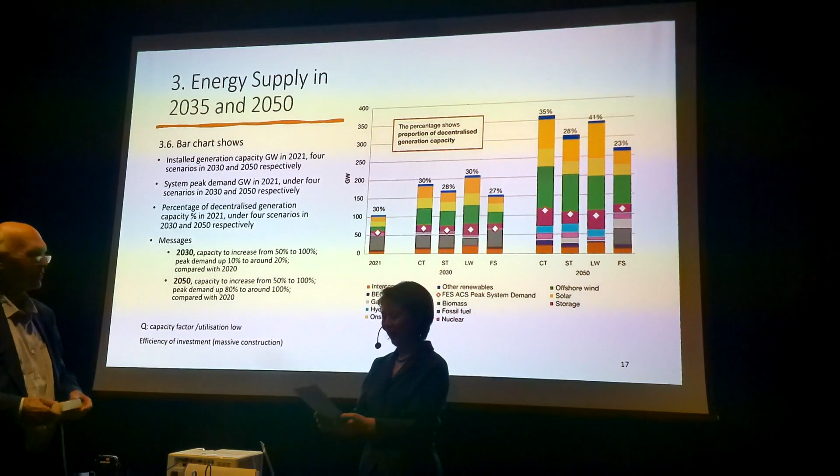Right. So I think we've had a really wonderful, comprehensive talk. I had no idea there was so much detail and so many interesting factors and so much to do with people reacting in the right way and so on. It's a really nice system. And I think we would like to now show our appreciation for the comprehensive way in which Aijuan has educated us all. Well worth 1 hour of CPD if you want to do it.